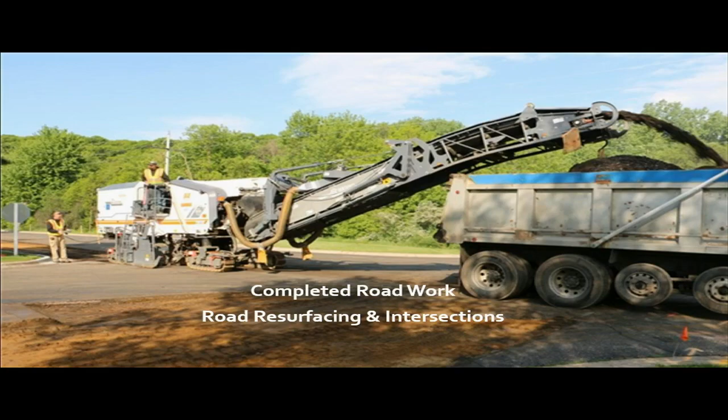As the chairman mentioned, I wanted to take the opportunity to reflect a little bit on the various projects we've been working on and continue to work on for the residents, bring everybody up to speed on where we're at, and reflect on the ones that are completed. As everybody knows, we did a lot of road work this past summer and are still currently doing road work. That's the first set of projects I wanted to go over.

All of this work was funded through the road maintenance millage and the road improvement millage that was passed by voters last year. We'll touch on a couple of different maintenance projects, but also some of the capital projects we worked on. The picture before you is a picture of a milling machine.

A large portion of the road work we did this year involved this piece of machinery. The process is primarily to take the 3 or 4 inches of surface off the existing road and then put new material down. So the first step is to remove the old, and then the paver comes in afterwards and resurfaces that road.

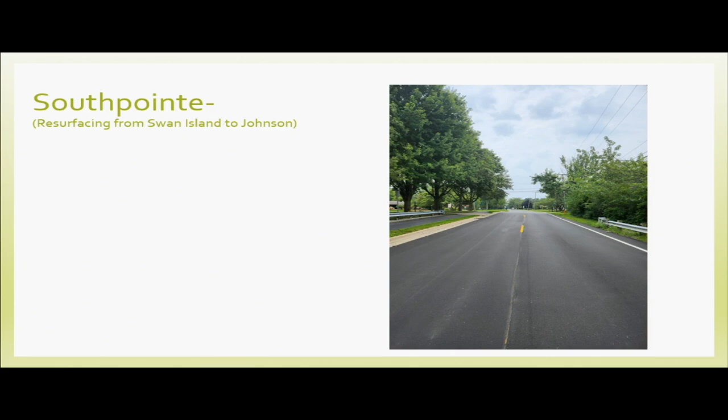One of the roads we worked on was Southpointe, resurfacing from Swan Island to Johnson. That was right near that bridge, near Swan Island Drive, the bridge that crosses the canal, right past Johnson. So that was one area that was resurfaced.

Church Road was resurfaced from Meridian to West River. Under our project list, this was, I think, the first road they actually resurfaced. I don't know that it was originally on our project list, but it was eventually added, being that the Church Road stretch between Meridian and East River Road was repaved last year. This completed the resurfacing of that entire stretch.

We also did the resurfacing of portions of the gravel roads that intersect Church. We went back a certain distance to make sure that gravel didn't come onto Church Road when we did that project. This was full width, so we tried to extend the road width where possible, so we actually got a little bit wider of a road than what was there previously. So that's Church Road, Meridian to West River Road.

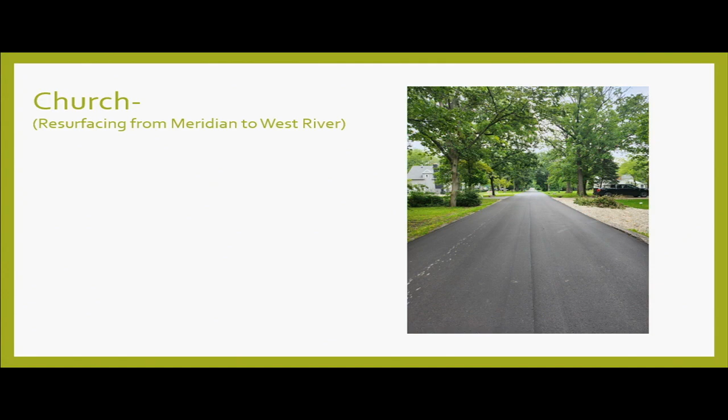West River Road, starting from Church and going to Meridian — when I say Meridian, I mean around the bend at the north end of West River. This was a mill and fill as well. We had also done some drainage work on that stretch of road, so we already had new surfaces in those areas, which saved us a little bit, not having to redo those when we did this stretch.

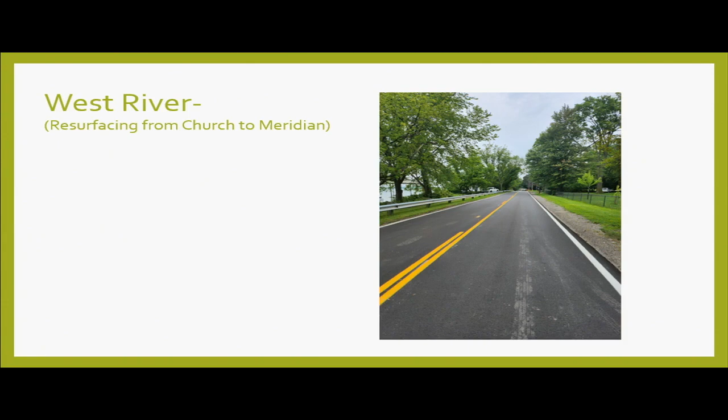This is obviously one of the worst sections of road we had in the community, and the residents who live on this stretch, but also residents in general, were very relieved with the work done here, which took care of a lot of long-standing issues. From Grow Road all the way down to the north end of West River Road, all of that road is in pretty good shape now. So you can drive from one end of the island to the other on West River Road, and for the most part drive on newer surfaces.

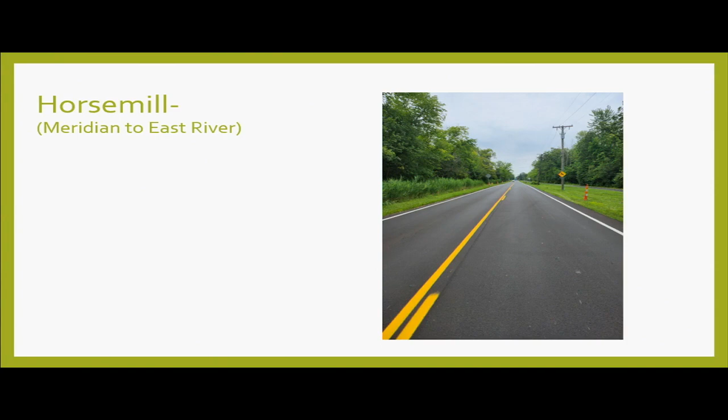Horsemill was a 2-inch mill and fill, so a little less depth. But if you recall, the drivability of that road wasn't great — there was a lot of washboarding, a lot of bumpiness to it. So we took that surface level off and replaced the 2 inches on top. That's a very nice, drivable surface now, all the way from Meridian down to East River. That was, I think, welcome relief for those who travel that road.

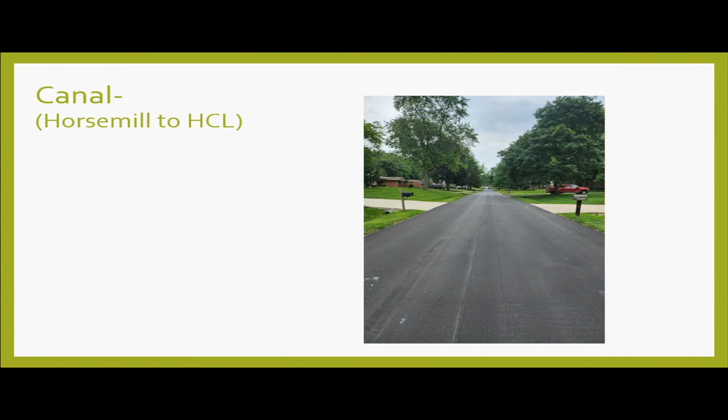We were able to realize some savings as we went through the project. We had less full depth replacement than was built into the budget. So when it came time to close the project out, we had capital available that was part of the bid but wasn't used. We appropriated those unused dollars and added Canal and HCL Jackson Drive, off a canal. Those roads weren't in horrible shape, but would have required substantial crack and joint sealing, probably close to $150,000, and we spent about $350,000 resurfacing those stretches instead. So rather than crack and joint seal, we put that money toward resurfacing. That was a nice addition that wasn't originally planned, but with those additional monies and favorable bids, we wanted to optimize those good dollar figures and add those projects with the money already budgeted.

And that's, once again, HCL Jackson Drive, from canal to canal. It comes off a canal and wraps back around a canal. So that work was done as part of the project list that wasn't originally anticipated.

What did they do, rotomill it? They rotomilled it, yep, that's actually an overlay. It's a concrete road, and the county came in years ago when people were complaining about how bad it was with the concrete, and put 2 inches of asphalt on top. It lasted quite a long period of time. So we went right back down to concrete and resurfaced with the 2 inches that was there. We're hopeful it lasts as long as the original 2 inches did.

The concrete didn't look too horrible underneath. A lot of times with an overlay like that, you'll get reflection cracking from the joints below, but since it's a concrete overlay, we should see pretty good longevity. There wasn't a whole lot of wet surface underneath either, so there wasn't much undermining of the asphalt through moisture, so I think we're going to be in pretty good shape.

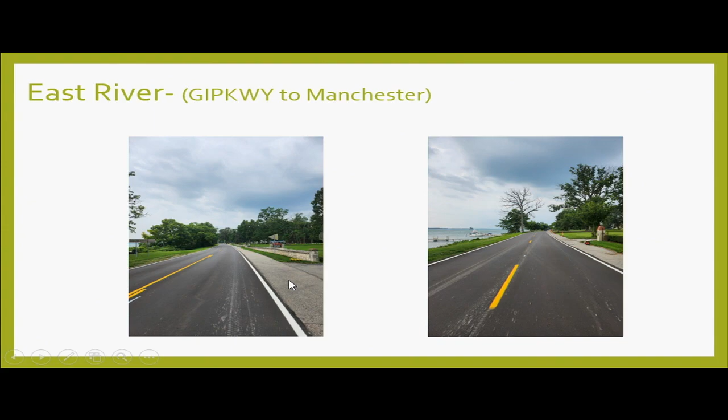Bellevue, East River to Meridian, was another stretch of road planned as part of our road project. Initially the road appeared to be in good shape as far as resurfacing, but once we got some moisture on the ground, we realized there were a couple of areas with ponding. So we do have some punch list items, some work still to occur on Bellevue.

To facilitate some drainage, what we ran into was Bellevue has a lot of intersecting driveways with different elevations. As the contractor resurfaced the road, they tried to modify elevations to meet the driveway intersection heights, so you ended up with a road that kind of dipped because they were trying to make those driveways match into the existing pavement. That's where some of the ponding is coming from. We also have a lot of built-up shoulder on that road, so the contractor's going to come back and shave the elevated shoulder in areas where water was getting trapped because it didn't have the ability to flow off.

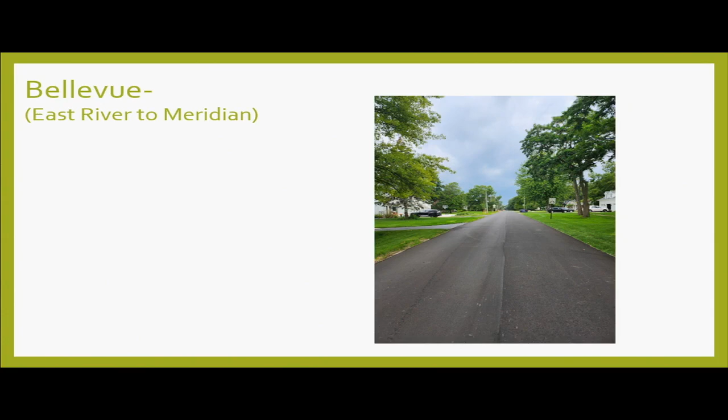What did they do around the manholes that were sunk when you go down there? On Bellevue, you'll notice they pitched it down a little bit to them, so they tried to make it as flush as they could. Because the sewer separation project, when they put that in, they paved Bellevue, and then it kind of settled around some of the manholes. So we didn't raise the manholes or change the elevation of the rims, but they feathered it in the best that they could.

They did pave back on some of the numbered streets over there to keep the gravel off, and we were pooling a decent amount of water there, so they've got to roto-mill some of those back and readdress the crown in some of those areas. So there is still some work that has to happen on the numbered streets.

3rd Street was another road that was added to the list. So you had Canal, HCL Jackson, and 3rd that were added with the additional money we had left over from the lack of the full depth replacement that was necessary.

So you'll see that 3rd Street was a full repaving, mill and fill, up to the Centennial Farm. That was curb and gutter, but it was just in kind of poor shape. It was a good candidate for that, because with it being curb and gutter, we got a pretty good road, and everything's confined with the curb and gutter.

So that was an additional road that I don't know is on this presentation, but it was part of the additional work that we did.

We're still currently working on Parke Lane. There was a substantial amount of drainage work that had to be done out there, just turning it from a dirt road into a paved road—a lot of culvert work, storm structure work, and grading and pitching that needed to happen. They were supposed to have started doing the final grade on the road surface last Thursday and Friday.

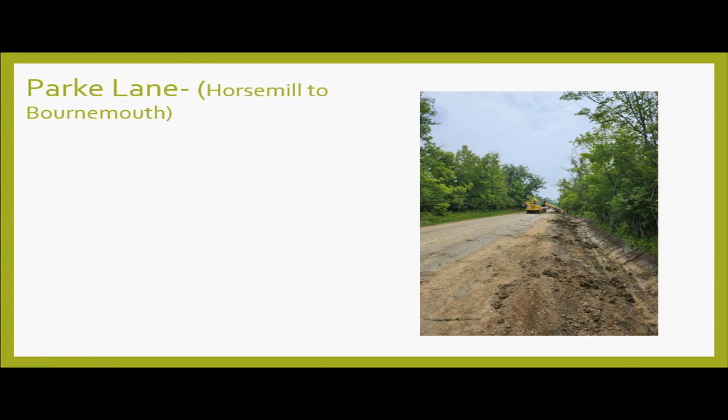We did do a variety of intersections as well. West River Road ramp was one of them. If you recall, we did some drainage work—this intersection used to pool a lot of water. We installed a new storm drain here and a new storm outlet going underneath the road, so there was a trench that was cut and backfilled with cold patch. We wanted to make sure this intersection got repaved to clean that up, and that turned out pretty well.

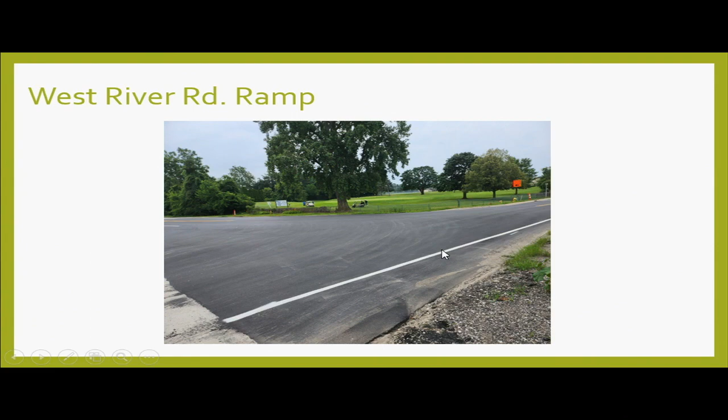Additional intersections: Southpointe and Groh Road, East River, Bellevue and Meridian, and Church and West River—so there were 4 additional intersections that were completed. We also did some work by the wastewater treatment plant repaving that stretch, and some work at the Church Road and West River Road intersection when we did that work.

So the total contract cost for all that was about $2.9 million. We probably won't realize that full contract because included in there is a fair amount of contingency, but we'll go over that budget later on in the presentation. So just keep that in mind.

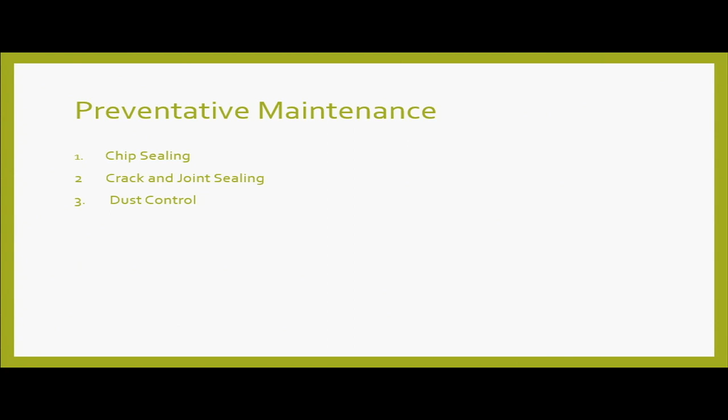With our road millage funds and also with some of our road maintenance funds, we did a couple of different projects this year. First one being chip sealing that came out of our road millage. Crack and joint sealing and dust control came out of our road maintenance account. So we'll go over that quickly here.

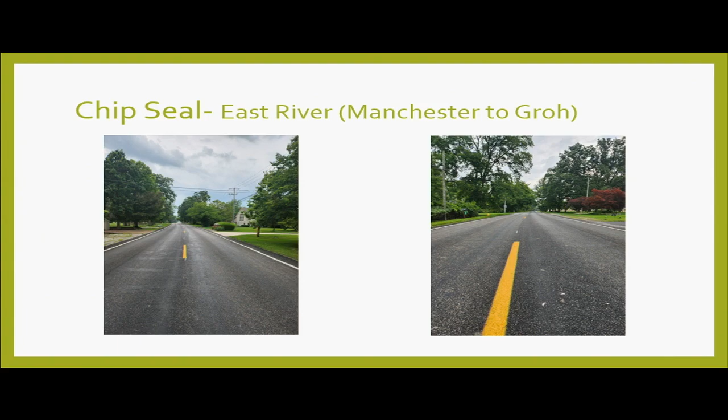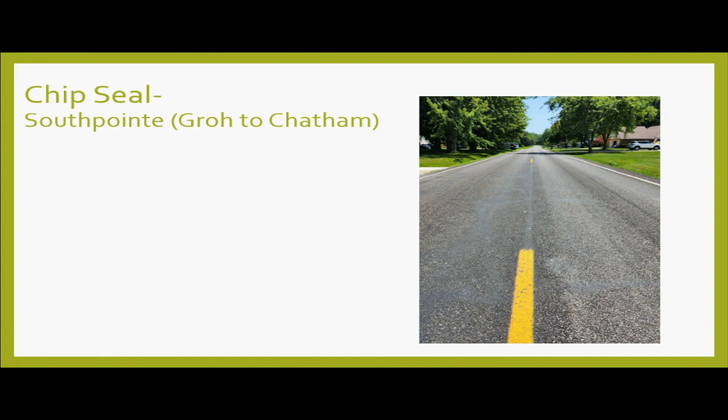Chip seal, East River Road, Manchester to Groh, that's over here on the east side. Chip seal Southpointe, Groh to Chatham. So we chip sealed a portion of the road and repaved a portion of the road. That was kind of a combination project.

And then we're looking at adding, hopefully yet this fall, East River farther south between Mesa Island Bridge and Hickory Island, Dallas Court or Dallas Circle, and then Bridge Road from Meridian to Park Lane. So that is planned to occur yet in September here.

As far as crack sealing, we did a variety of different roads based upon their candidacy for crack sealing. They were all asphalt roads. We didn't pave or do any crack sealing on any concrete roads. This is a very cost-effective process. I think we spent about $60,000 or $65,000.

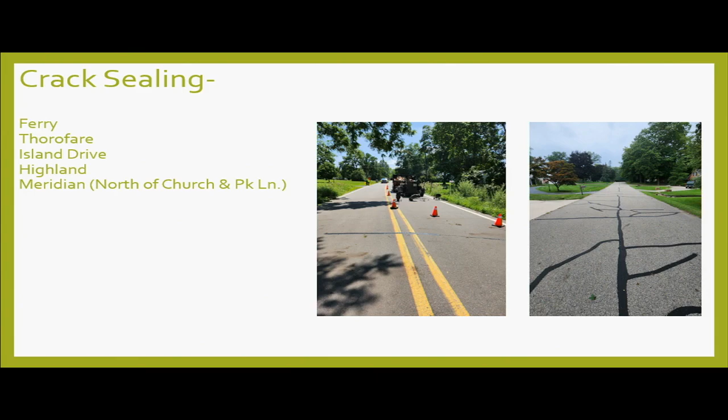So we spent right around $65,000, and that got us Ferry, Thorofare south of Church, Island Drive, Highland, and then Meridian north of, it's actually north of Bridge Road, so it's as you go north.

And then in the Highland Island Drive area, especially the Island Drive area, there's a lot of side roads in there, and we did all of the side roads. It wasn't just Island Drive, it was actually a lot of the subdivisions in that area. So we were able to touch a lot of different areas. We also did Park Lane between just south of the northern intersection of Meridian and Park Lane, moving south down towards Bridge. So that's that whole triangle point at the north end of the island we pretty much did.

And this is something that if the communities are going to competitively bid it next year, we should definitely take advantage of, because it really does prolong the life of these roads. A chip seal following that is actually a really good one-two punch for the preservation of those roads. So just keep that in mind.

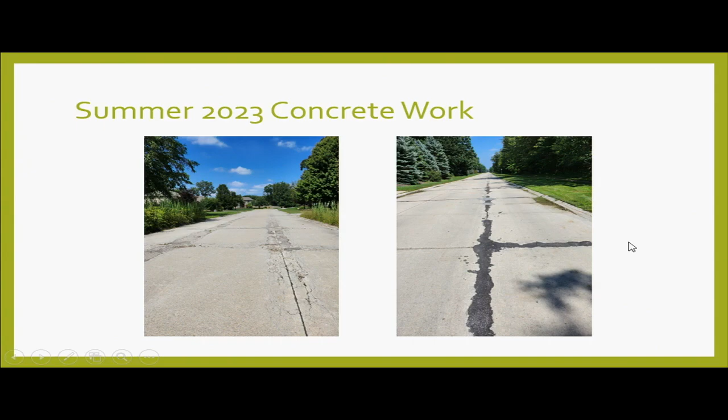But these are old pictures. The new pictures aren't included in the slide, but if you want to review that work, feel free to drive those when you get the opportunity.

So we do have some remaining road work that we knew we were going to have to accomplish in subsequent years, one of them being Ferry Road. Because of the reconstruction of the Meridian Road Bridge, we knew Ferry Road was going to be a detour route, so we didn't put that on our list.

But what we did do is reserve money from the bond, set it aside, and said we need to make sure we preserve funds and not spend those so we have available capital to repave that road.

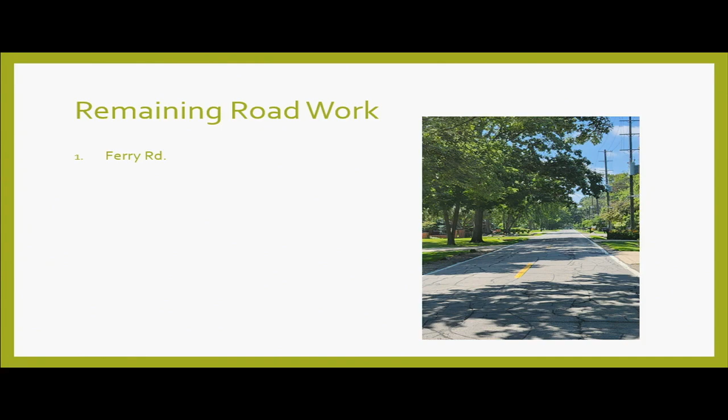I know there's talk about Ferry Bridge being redone potentially next year. More than likely it'll be the year after. But I don't know, and the chairman and I were talking about this earlier today, that the reconstruction of the Ferry Road Bridge necessarily precludes us from repaving Ferry Road, because I think the reason we didn't do that was because it was a detour route with the Meridian Road Bridge being out. So I would expect we could do that next year and accomplish that much needed improvement.

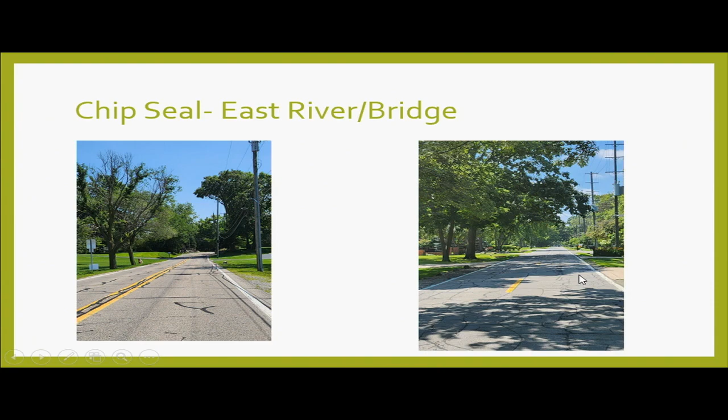We talked earlier about chip sealing East River to the bridge, so that's remaining work that has to be done, hopefully yet this fall. And in addition to that, Wayne County work.

Wayne County's on the island doing work on the Meridian Road Bridge, a project we're all familiar with. They appear to be behind schedule. I was out there today. They have one abutment complete, and the other one they're currently working on. In talking with the inspectors, they should have already had that second abutment poured and be working on the span. So we'll have to see how that plays out with the rest of the work they're supposed to do, the repaving of Meridian, which is to follow that bridge replacement.

So we'll see. Derek, before you get into the county work, I'd like to make a comment. Sure.

About all the road work done this year, it's a good report. I'm impressed with all the projects we did. One of the keys is, first of all, we've been working on this road stuff for many years, right? It's been a minute. So first, thanks to the voters again. And Derek, thank you for pushing the projects, and you really did push them, I appreciate that. The scheme was, when we got approval, that we were going to sell the bonds, a $6.5 million bond issue. I know you're tracking the funds, but that's why we were able to do so much this year. And as Derek said, Ferry's a big one, and I think we should proceed next year with it because it's in really bad shape. If we can get a little more edge widening on that, that'd be great too. So those are a couple comments.

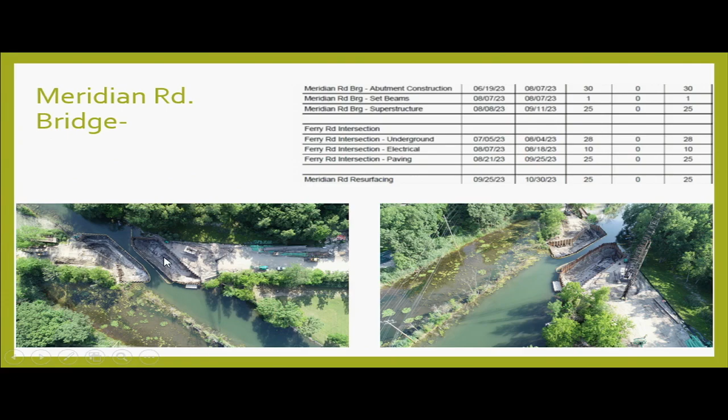But you're working to get Ferry Road intersection opened up? So right now the intersection is open for school buses the first 2 hours in the morning, I think from 6:30 to 8:30, and then the last 2 hours in the afternoon, I think from like 1:30 or 2 o'clock to 3:30. But that intersection, and I wish I had a picture of it, but that's a full reconstruct.

So they're taking it all the way down to the dirt, quite a distance from the intersection. So I guess the county wanted to rework the alignment of that intersection and then put in some pedestrian controls. So it's more than just a resurfacing or work there.

They had to do gas line work. They had to do storm work for the bridge. And now they're doing a reconstruction and alignment of the whole intersection. So that is a pretty substantial project.

I was down there tail end of last week, I think last Friday, and they had the whole southbound lane completely ripped out from Ferry back probably a good 300-400 feet. So it's a pretty significant project and probably won't be completed, we're being told, until the bridge is complete. So another maybe 45 days, I think, if we're lucky.

And the only comment I have is, I think I said this to you a couple of months ago too, I understand the resurfacing issue, but there's little traffic now between Island and Ferry. If they opened up when they're going to pave that intersection of Ferry, it'd be great.

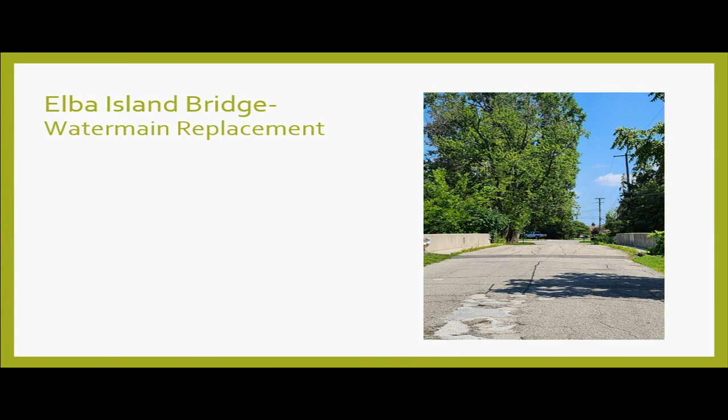So that is going to be a cost to the township to do that relocation. Before Ann left, she ran the financials on capital reserves for water main replacement. We've got about $635,000 sitting in the bank to do a replacement out there, which should be more than enough to do that work, but also we've got the Meridian Road water main issue that we need to address as well. So I'm going to have to work with the treasurer, and we'll have to figure out how that all plays out with regards to those two water main issues at two bridge locations. But this one needs to be done ASAP to make sure that we don't stand in the way of the scheduling of that bridge replacement.

I have a question on that, Derek. Why are they saying we have to replace that water main? My understanding is it's located within their road right-of-way, within their easement. So if it's in their property and in their utility easement, it's our obligation to move it. Okay, because it is a new water main that's in there. It's probably early 90s? Yeah, it's a 12-inch main now. Right, used to be a 6-inch main. So when they did the sewer separation, they came along and put a new 12-inch main all the way down Elba. Yeah, it's a shame because it's not all that old.

But it's going to be in conflict. This would be laid at the bottom of the canal. It would be directionally drilled. No, they did that to us on the Swan Island, the South Point Bridge. They told us we had to move the water main. It was a brand-new water main at that bridge. We moved it, and it wasn't necessary to move it. Yeah, the unfortunate part is we spent a lot of time locating it because we wanted to make sure of that. And it's not necessarily an issue, I believe, on this side, but it is on this side. So it kind of curves in, or it's on an angle, so it's right in conflict. So yeah, unfortunately it's not gonna work out, and we might have to put it in a casing too, Bill, as you asked about that, so that might dictate the installation method too. So it definitely is a conflict. There'll be more to come with regards to that. That'll be a project that's engineered, bid, and then it'll be before you guys to go ahead and recommend to the board for approval. So that's in process.

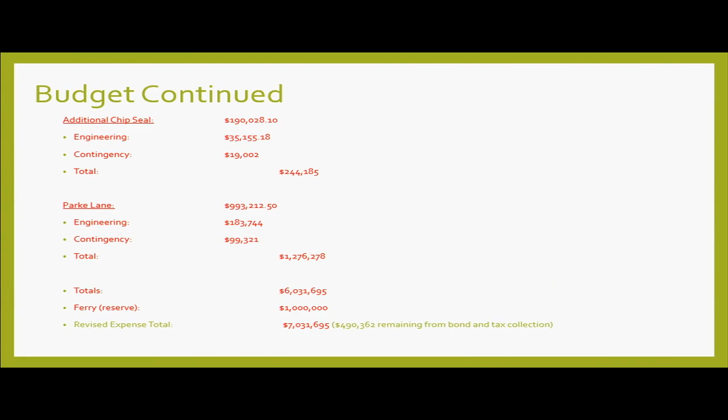If you recall, the tax revenue less the bond payments left us with a balance annually for road work, and I want to say that number was right around $350,000 per year. But if you recall, our interest rates came in probably better than what we thought they were going to be, so that number, we've got to get a revised number on that.

So for next year, if you look at $490,000, which doesn't include that contingency which could be upwards of close to $500,000, plus the $350,000 that we would have, we're probably going to have in the realm of $1.1 to $1.3 million next year in work, and that doesn't include Ferry Road.

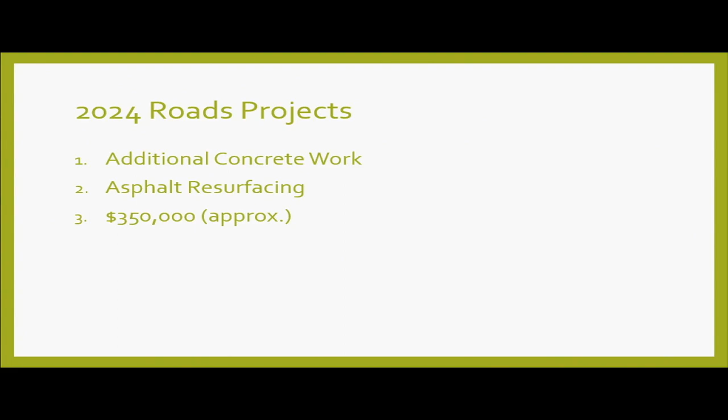Ferry Road, that money doesn't take into consideration that $1 million that's sitting out there, and we won't know what Ferry Road will come in at, but $1 million is a pretty conservative estimate when it comes to a mill and fill. Like Bellevue, I want to say was like $400,000, $450,000, maybe a little bit less than that.

So I would be very surprised if we realized $1 million on Ferry Road. So we could be sitting in a pretty good position to do a substantial amount of work next year, depending upon Ferry, depending upon project closeouts, depending upon contingency. We're in the 1.1 to 1.5 probably with Ferry Road. So keep that in mind as we talk about figures.

Good piece of news when I originally put this presentation together, it was actually going to be presented the night before the millage for the drainage millage question. That was on the ballot, I think, on the 9th or the 8th of August. That did pass, and I'm very proud to say, and I take no credit for this whatsoever.

It has to do with the commission, and I think the work that the department does, the staff does, and the projects we do. But that millage request renewal passed at a better pace and a better differential than any of the millages that were on the ballot for that evening.

So I think we were right around 80% yes to something like 20 or 19% no, something like that, which was once again a better differential than any of those questions. So what that tells me is that the residents recognize that there's a benefit to that millage, and they recognize that probably through the work that has been done.

So I wanted to take a minute to kind of address how those dollars have been spent probably over the past 12 to 18 months through the different projects that we worked on. So we had a variety of different projects.

Island Woods, we worked in there. Meridian Woods, we worked in there. Manchester Ferry, and then the roadside ditching and the West River Road work that we did. So let's just take a minute to touch on that real briefly.

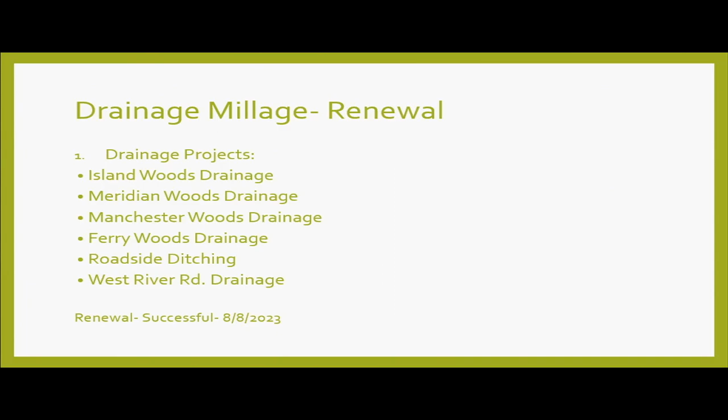Island. When I came on board probably 3-4 years ago, it was brought to my attention that there was a lot of drainage issues on Island Drive. There was an existing drainage path that hadn't been maintained in a long time, 20, 30, 40, maybe even 50 years.

Island Boulevard, yes. So this property is primarily open space. It is open space to the south of Island Boulevard. There was a tremendous amount of drainage that was being directed out onto Island Boulevard and overwhelming the storm system out there, flooding yards and flooding homes. So utilizing the township's contractor, the existing ditch line was recut back there to redirect the direction of that drainage back towards the Thoroughfare Canal.

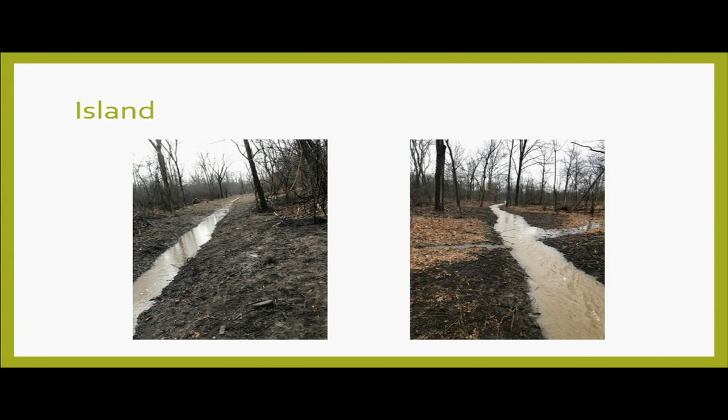And that drainage work that we did, we had 4 inches plus rain, I think probably 2-3 weeks ago. We didn't have an ounce of drainage issues, no flooding on Island Boulevard. That corrected that problem and was a tremendous success. So that's one project that we worked on and has proven to be effective in eliminating a problem that we had.

Before Manchester, on the east side of the road, the water would come out of the woods, flood all these yards on Meridian, and then traverse over to the west side of Meridian and down towards Hawthorne. It made a long, winding route towards Hawthorne and eventually to Frenchman's Creek. All that water was draining into a single catch basin, going under the road, and it wasn't adequate — not a significant enough pipe size or conveyance to carry this much water.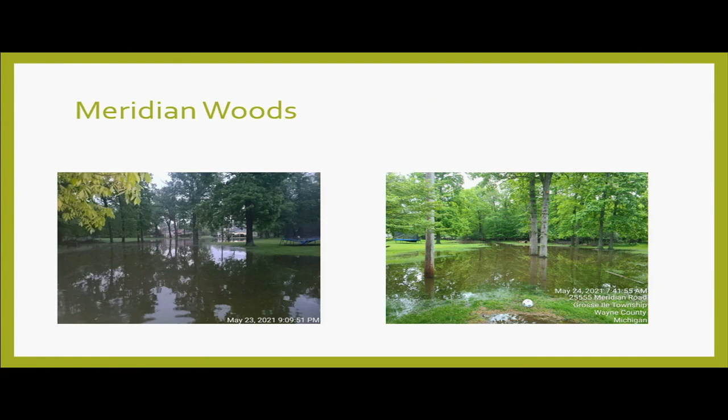There was an existing drainage ditch back in the woods that hadn't been maintained in probably 50 or 60 years, so we went back and recut it. With the 4 or 5 inches of rain we had 2 or 3 weeks ago, those yards were completely dry. This entire project was $16,000, and we took care of problems for about 6 or 7 houses in that area. For reference, we have a drainage grant program where we authorize up to $5,000 per resident, so long as they spend $5,000 of their own money to correct a drainage problem on their property. So we were able to solve a problem for 6 or 7 homes at a cost of $16,000, versus what probably would have cost us close to $30,000 under the drainage grant program, plus another $30,000 for the residents. That, to me, is a success, and none of these issues exist any longer. That was a really good project.

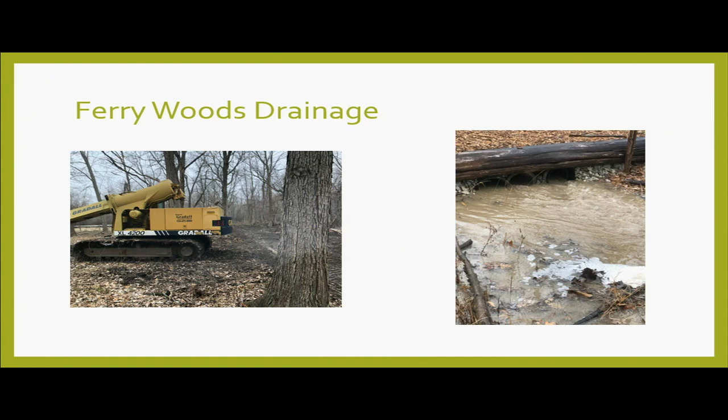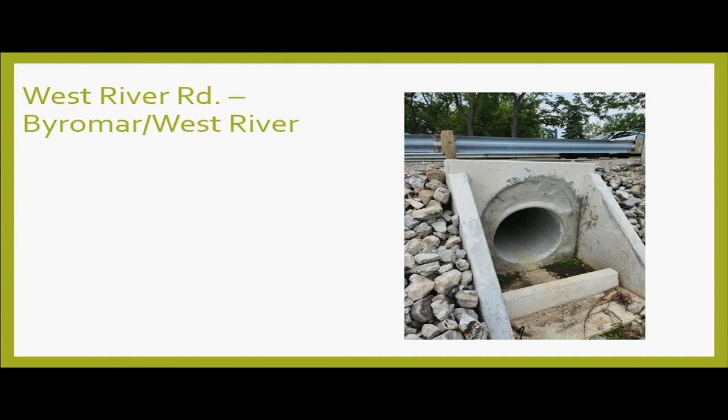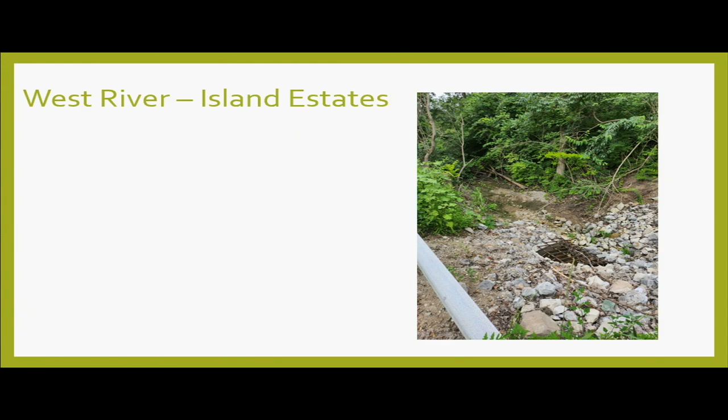The same issue existed farther north on Island Estates. This is looking on the east side of the road. This structure and conveyance was almost completely collapsed, and water couldn't be carried east to west, under West River Road and over to the river. This work was completed at a cost of about $350,000 for both locations, and that was done last fall.

So that's drainage — just wanted to touch on that briefly to let the residents know where that money's going. Our role and goal is to identify problems and provide complete solutions to those drainage issues. We want to make sure the money we're spending impacts multiple properties, and I think we've done that with a lot of the different projects we've completed.

We're all familiar with the wastewater treatment plant.

We're working on the ACO work, the Administrative Consent Order work, which is the addition of the new final clarifier. We've worked on primary clarifiers, and we're currently working on primary clarifiers and sludge pumps, and we've done some beautification work over there. Just want to touch on that briefly.

If you haven't had the opportunity, and if Ryan's not opposed to it, take a look at the excavation to the north of the wastewater treatment plant. It's a pretty amazing thing to see. It seems like those guys are building either the biggest swimming pool or trying to dig down to China, but the hole is immense, and there's a lot going into the build of the new clarifier. Bill, do you want to add anything to that?

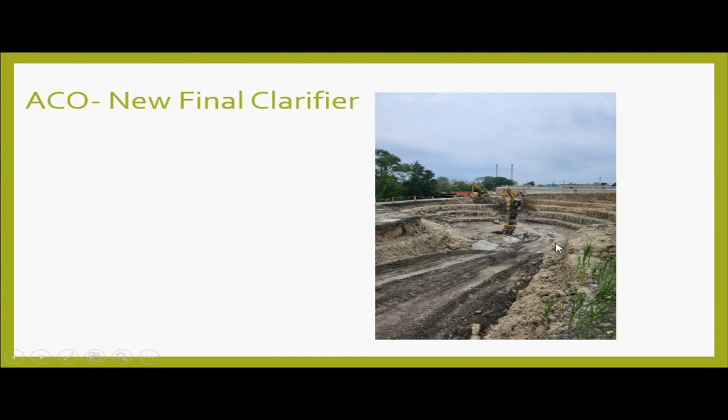Bill had mentioned earlier that the structure is still drained down. Yep, and if you wanted an opportunity to climb down in there and say you've been at the bottom of a sludge clarifier, then it might be your only opportunity to do that. It's a pretty impressive project. With the completion of that one, we'll have all 3 of them rebuilt within the past 18 months or so.

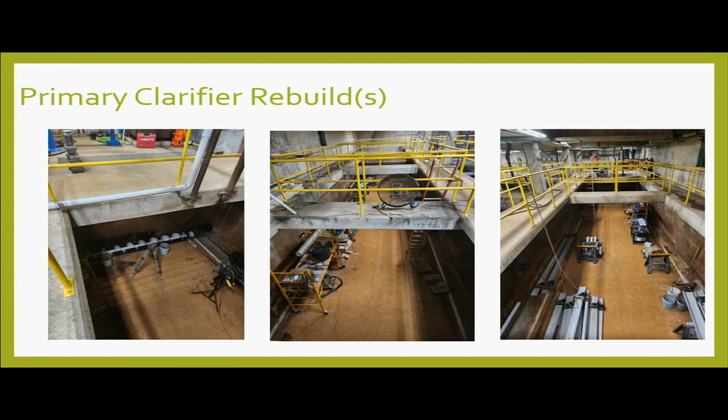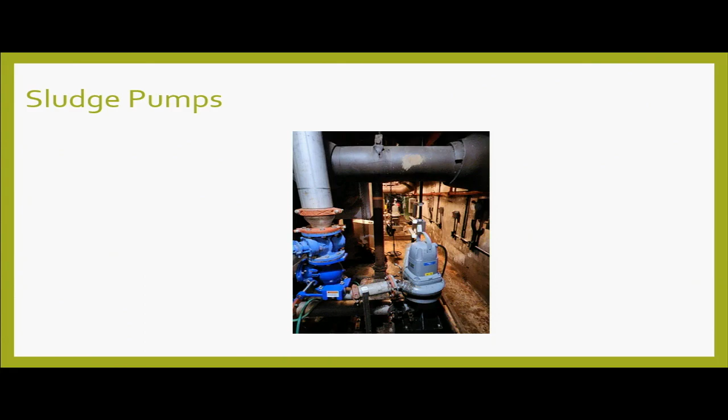Sludge pumps - we did replace 4 sludge pumps over at the wastewater treatment plant recently. We do still have some punch list items that we have to get taken care of. We got some priming issues on those, but those have been an issue for a couple of years, and we wanted to get those replaced. Those have been completed within the past 4 to 5 months, something like that.

We've also done some landscaping at the wastewater treatment plant to spruce it up a little bit. We had a new sprinkler system installed that draws off the canal, and also some planting, some general cleanup, some mulching, some bed creation. So it looks a little bit better, I think, than what it used to be for sure.

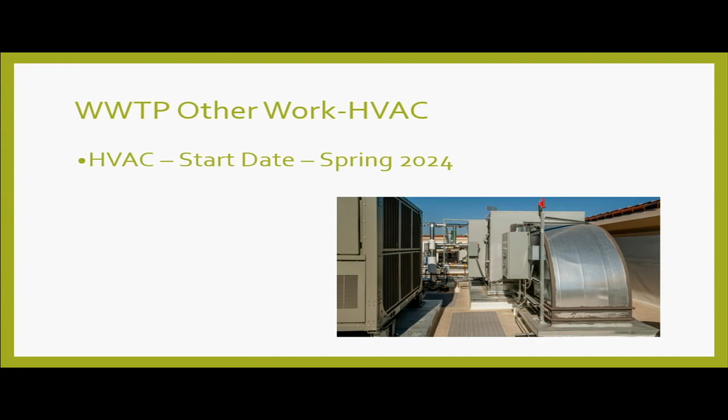We do have some wastewater treatment plant HVAC work that has to be completed. We do have a vendor under contract - they've submitted their bonds and their contracts, so we're off and running with regards to that work. But a lot of the stuff has a pretty significant lead time, so that project won't start in earnest until spring of 2024.

Getting towards the end here, so I know it's been a long presentation. We do have a lot of engineering work that we have ongoing. We have our asset management plan for our water system, which was authorized a couple of months ago. Below here, and it's kind of hard to read, is the overall schedule for the work being done and the timeline. That project is anticipated to complete about a year from now, in October of 2024.

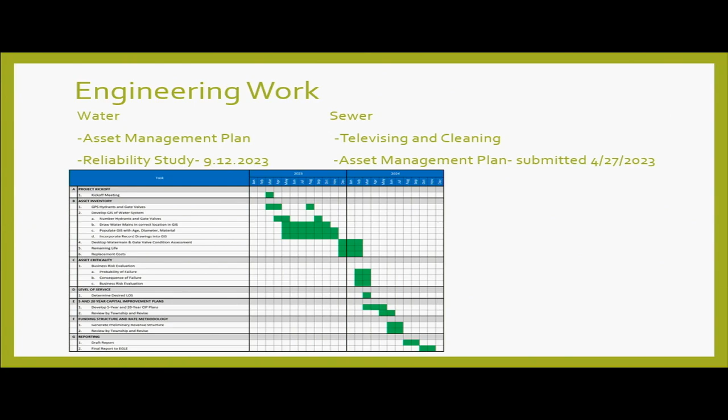For the residents' benefit, we've done an asset management plan for our sewer system, which included televising and cleaning the entire sanitary sewer system from the north end of the island all the way to the south end, and incorporating the condition assessments from the televising and cleaning into an asset management plan, which lays out a capital improvement schedule for the next 25 to 30 years.

The intent underneath the water asset management plan is to have a similar document which gives all of us a plan for the replacement of our water mains in a scheduled fashion, so that we can prioritize from worst to first the water mains we want to replace. Part of that also is a water reliability study, which is actually before you this evening - I think it's one of our only action items. That's an integral part of the asset management plan, and also is required by the state to be completed every 5 years.

The difference between the reliability study and the asset management plan is the reliability study looks more at flows and capacities, and less on condition, but flows and capacities are a reflection on condition. So the asset management plan and the reliability study fit together like tooth and gear with regards to asset management of our water system. We're not just sitting around doing capital work, we're guided by documents developed by professionals that provide a pathway, a game plan on how we're doing our capital improvements. I wanted to mention those as well.